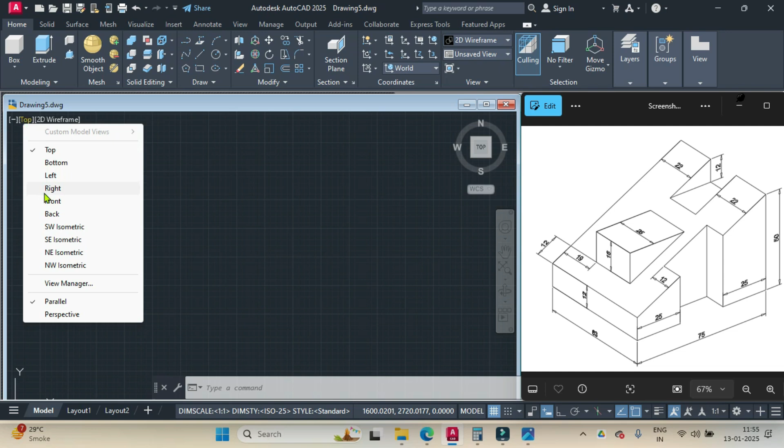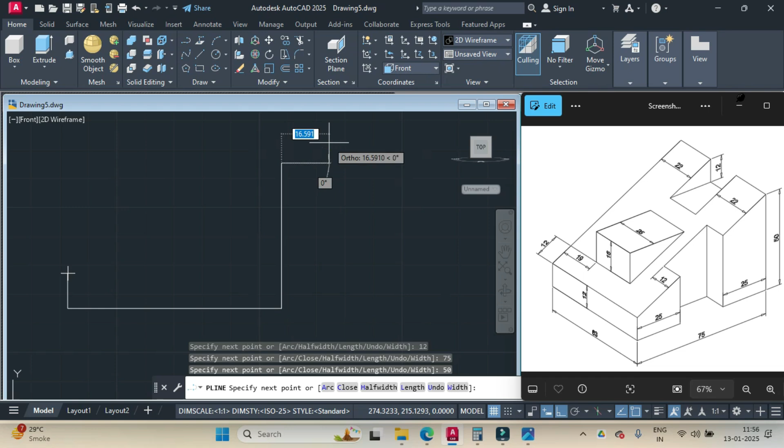Then we would use the P-line command, and we'll also turn the ortho on, and draw one P-line from here to here of 12 units, and extend it to the right 75 units and upward 50 units, and close it with the start point.

Then we use the southwest isometric view, and then we extrude this using the extrude command. We click on the object, press enter, and extrude it to a thickness of 63 units and press enter.

Now we want to create this shape. So what we'll do, the UCS icon, we'll move it here. For this we type UCS and specify the origin is over here, x-axis is here, and the y-axis is here.

Then temporarily we'll turn the UCS icon off. So we type UCS icon and we turn it off. And using the line command, we draw one line from here, extending upward to a length of 12 units, and then to the right to a length of 19 units.

Press enter. Then we'll bring the UCS icon onto this plane. So we type UCS, we click over here, x-axis is here, y-axis is here. You can turn the UCS icon on to see how it looks.

And now you can draw one line from here upwards. So I'll select line from here upwards 16 units and press enter. Again enter to end the line command.

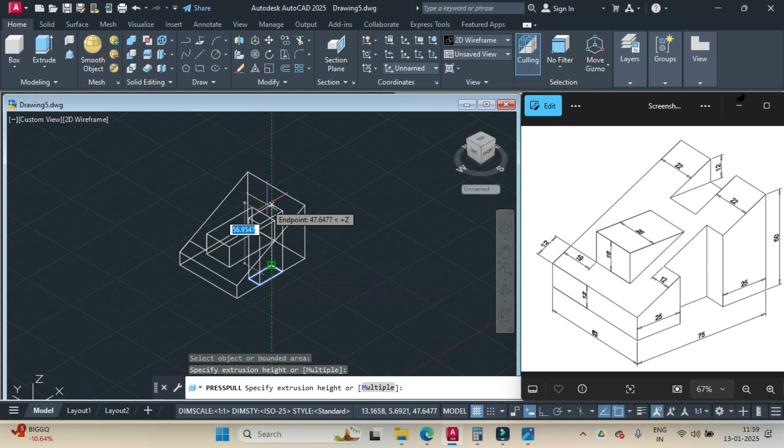You can turn the 2D wireframe on. And now using the press pull feature, we click on our object and move it beyond the thickness. Then press escape, then come back to shaded with edges.

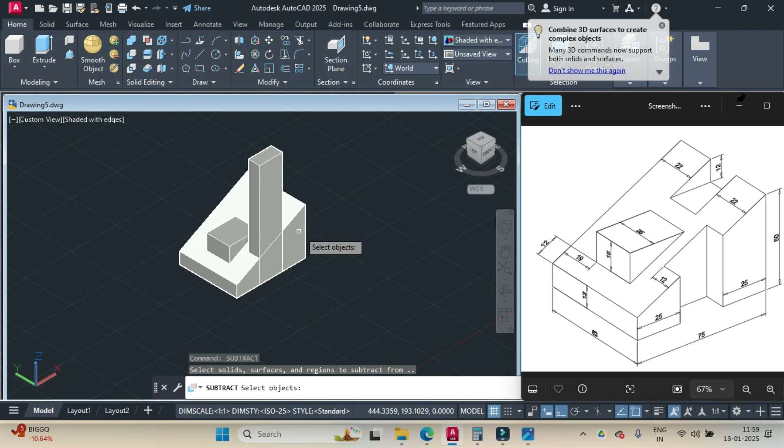Now sometimes you'll notice even after using the press pull feature, the object doesn't get cut. So in that scenario, you use a command of AutoCAD called subtract. Select the main object - this is the main object.

Hit enter. Select the object to subtract. Click on this object. Hit enter. And you get the cut. Then you can select the profile and just delete it.

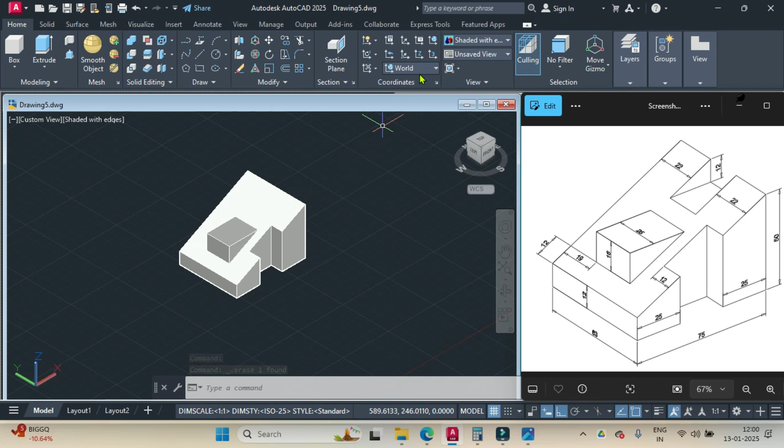Finally, we have to make this shape. So we click on coordinates and change it to left view. And again we use the rectangle command and draw one rectangle. The length would be 19 units and the width would be 12 units.

And we type move and we select the object to move this object. Base point, we select the midpoint of this, and where you want to move, the midpoint of this. You can again go into the 2D wireframe and then use the press pull feature.

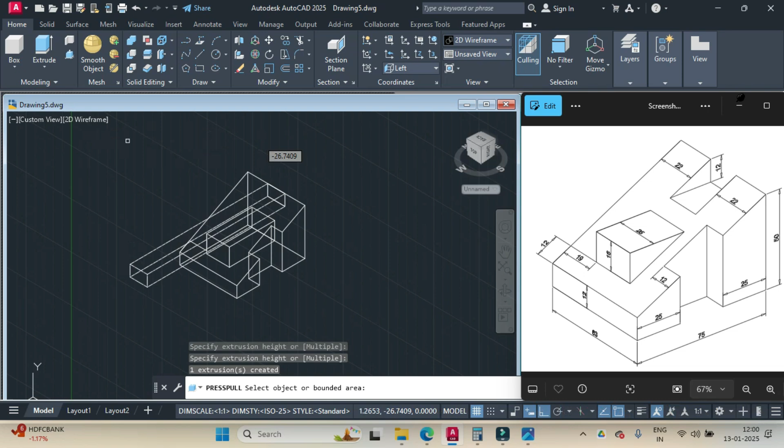Click on the object to move, and move it beyond the object. Press escape, again go into the 2D shaded with edges. And if the object is not cut, this time you know you can use the subtract command.

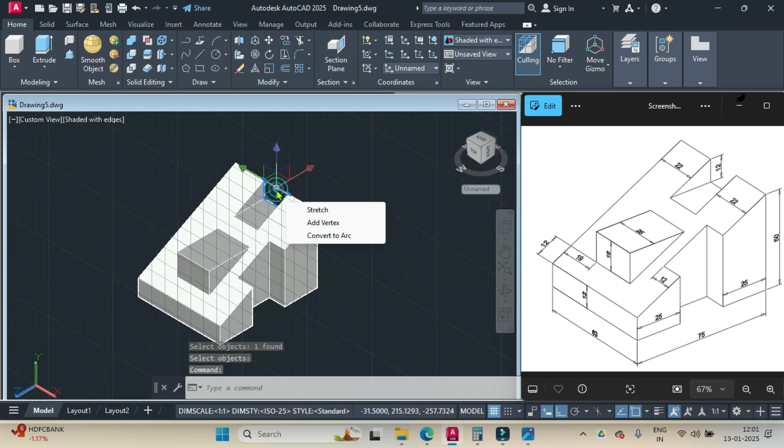Select the main object, press enter. Select the object to subtract, press enter. Then you can select the profile and delete it. You can turn the grid off by pressing F7.

And finally, use the union command of AutoCAD and select the objects and make it into one entity. And your geometry is complete.

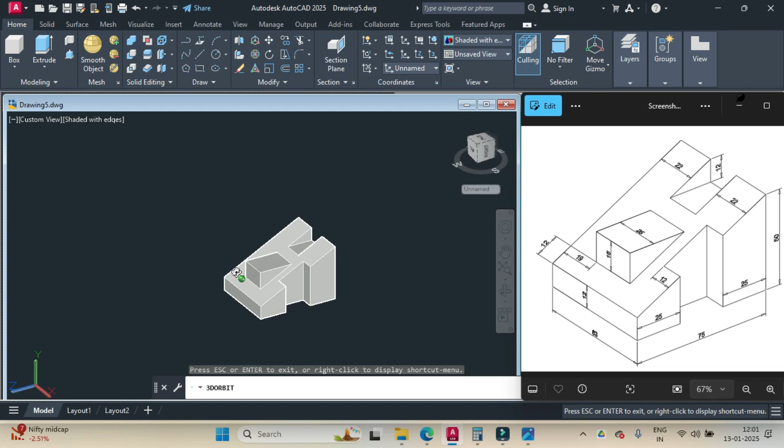You can use the 3D orbit command and view the object in all possible views till you get a complete view of your geometry. So friends, in this video tutorial, we have seen how to make this geometry in AutoCAD.